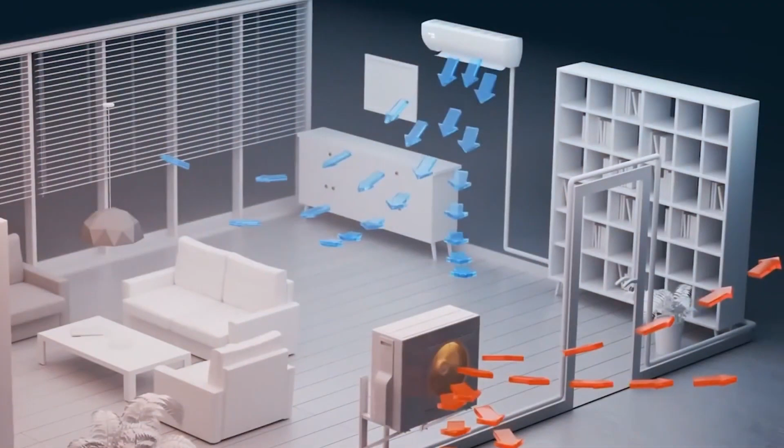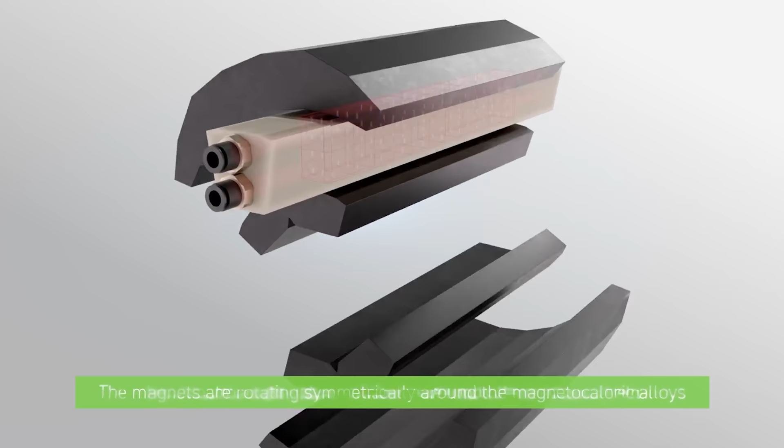Your fridge, your air conditioner, the cold chain that keeps your medicine alive—every single one of them runs on a technology that hasn't fundamentally changed in over 100 years. And here's the part nobody tells you: the gas hiding inside those machines is quietly warming the planet thousands of times faster than the carbon coming out of your car. Now China is racing to replace all of it with something that has no gas, no compressor, and makes almost no sound at all, just metal and magnets. The problem? The material this whole revolution depends on—China already controls almost all of it.

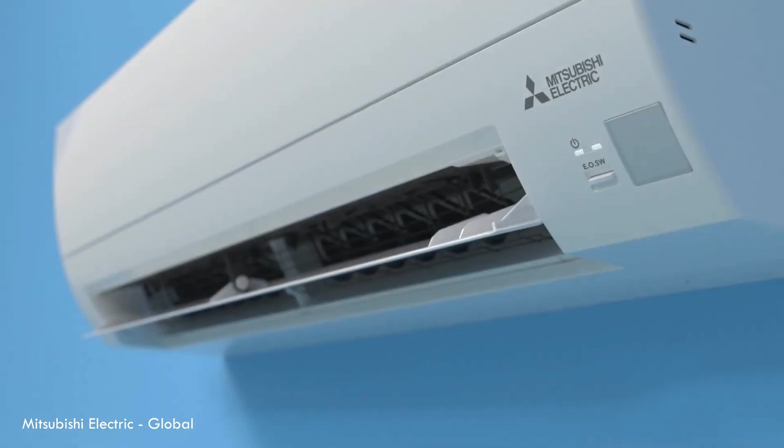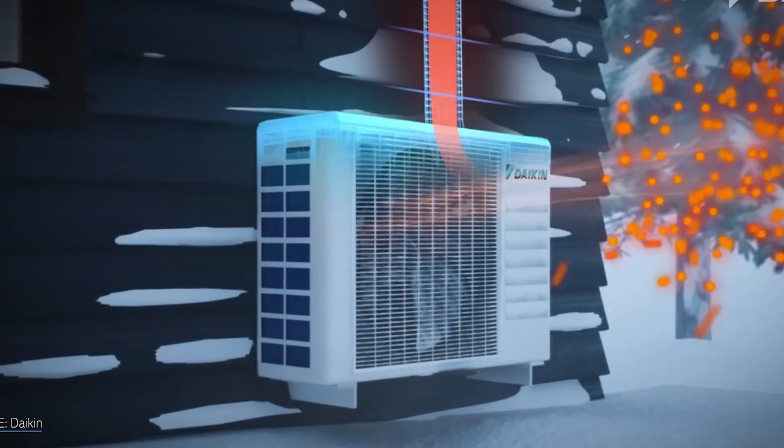Let me explain how your fridge actually works, because once you see it, you can't unsee it. Every fridge, every AC, every walk-in freezer runs on the same trick. You take a gas, you squeeze it hard with a compressor, and squeezing it makes it hot. Then you let that hot gas flow through coils on the back of the fridge, where it dumps its heat into your kitchen. Then you let the gas expand again, and expanding makes it cold. That cold gas loops back inside and pulls the heat out of your food. Squeeze, dump, expand, absorb—over and over, forever. That low humming sound you hear at night? That's the compressor doing this dance. It's a genuinely brilliant idea.

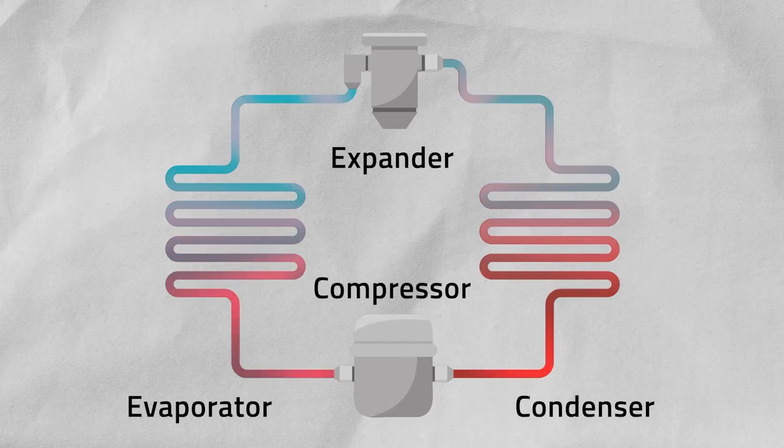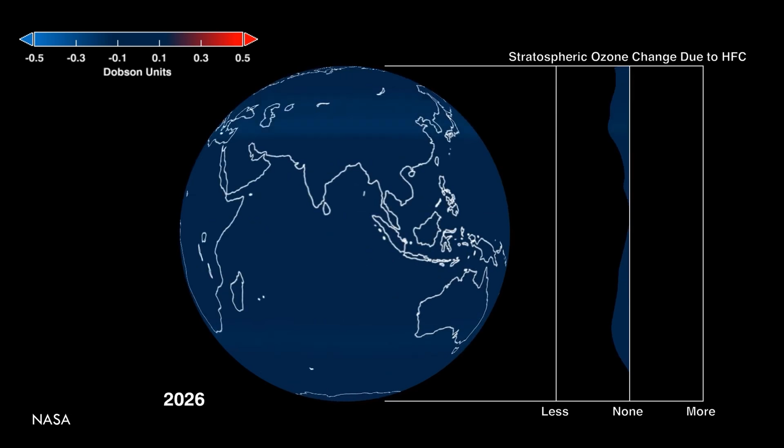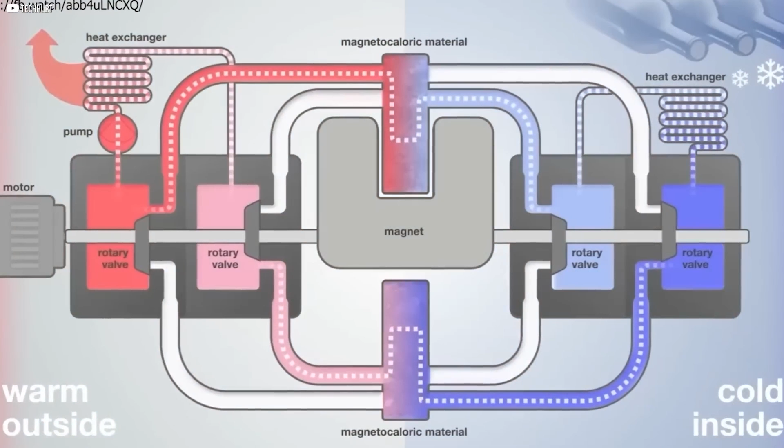Simple, cheap, reliable. But it has one flaw that we ignored for a century. The gases doing the work, the refrigerants, are some of the most powerful greenhouse gases ever created. We're talking about HFCs, hydrofluorocarbons. A single tiny leak of these gases doesn't just warm the planet a little, it warms it thousands of times more aggressively than the same amount of carbon dioxide. So while we were busy inventing cold, we were quietly cooking the atmosphere. And here's the frustrating part: every improvement we've made for decades—better insulation, smarter thermostats, more efficient motors—none of it touches the core problem. The gas is still there. The compressor is still there. The noise is still there.

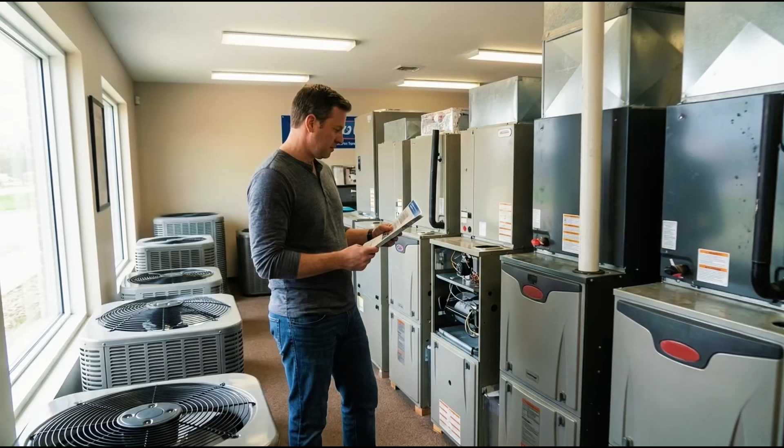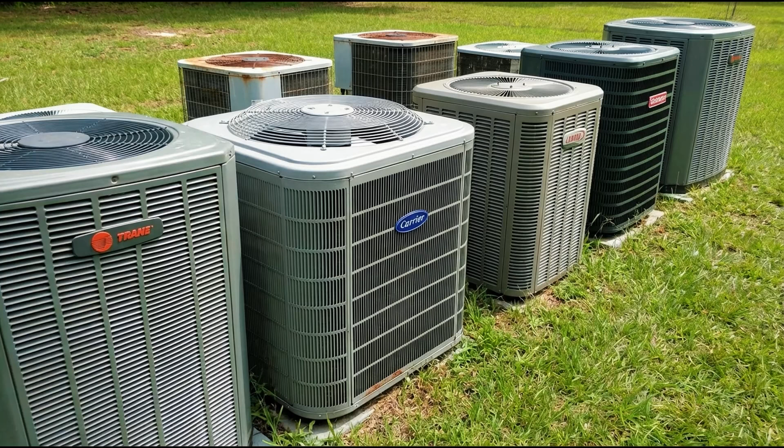And the scale of this is bigger than most people realize. Cooling isn't a small corner of our energy use. Think about it: every home fridge, every office AC, every supermarket freezer aisle, every hospital, and increasingly every data center full of servers that would literally melt without constant cooling. As the planet gets hotter and more of the world gets air conditioning for the first time, our demand for cold is climbing fast. Which is a strange trap when you think about it. The hotter it gets, the more we cool. The more we cool, the more of these gases leak out, and the hotter it gets. We built ourselves a loop that feeds itself.

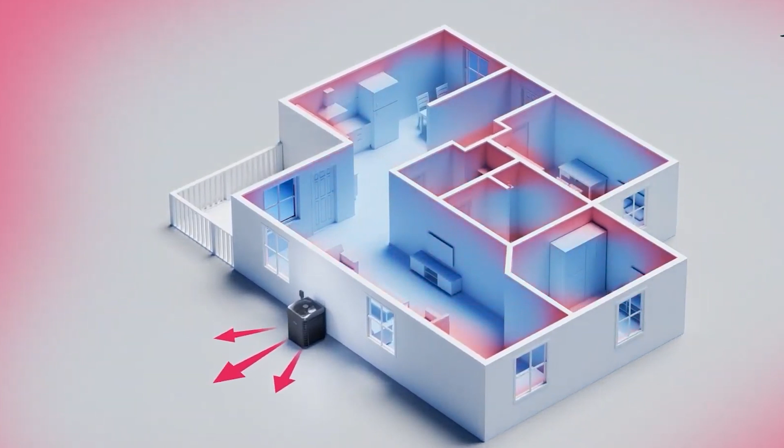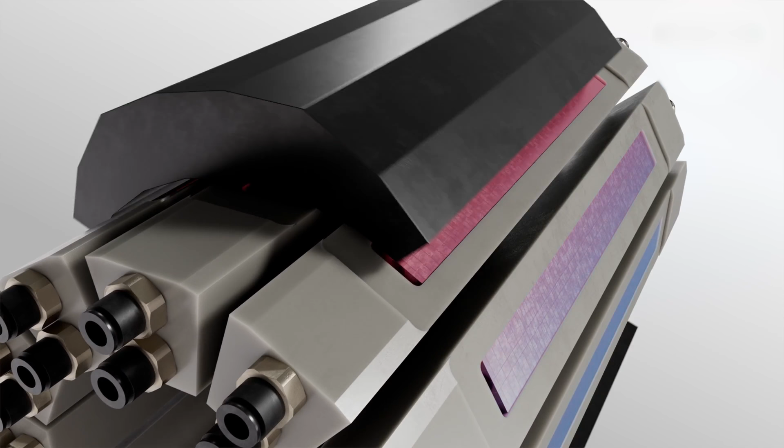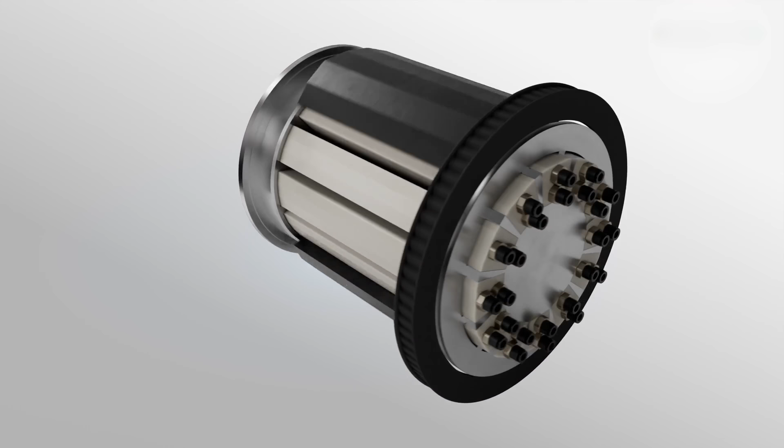So engineers around the world started asking a wild question: what if you could create cold without any gas at all? No squeezing, no leaking, no 100-year-old compressor. And it turns out the answer isn't hiding in a better liquid—it's hiding inside solid metal. This is where it gets strange. Okay, so how on earth does a magnet make something cold? This sounds like magic. It isn't. It's one of the most beautiful pieces of physics you'll ever hear, and I promise I'll keep it simple.

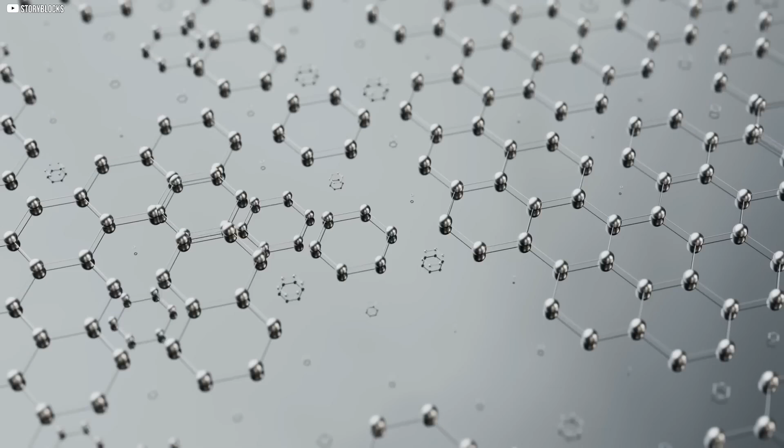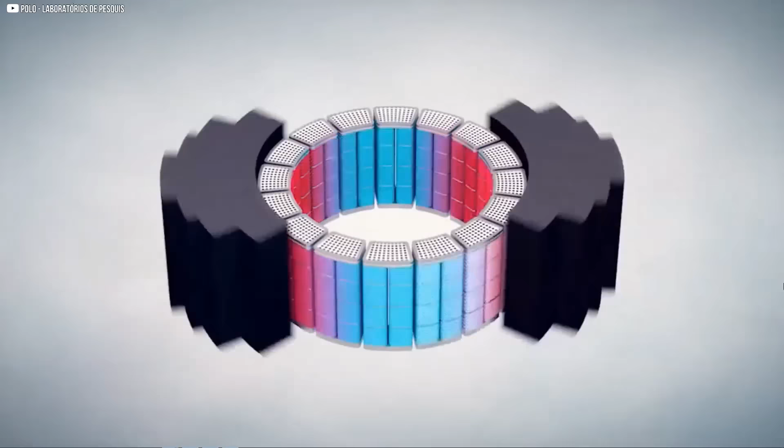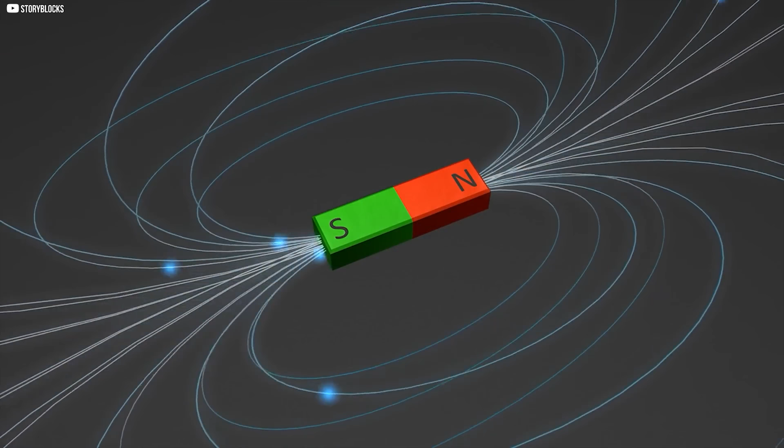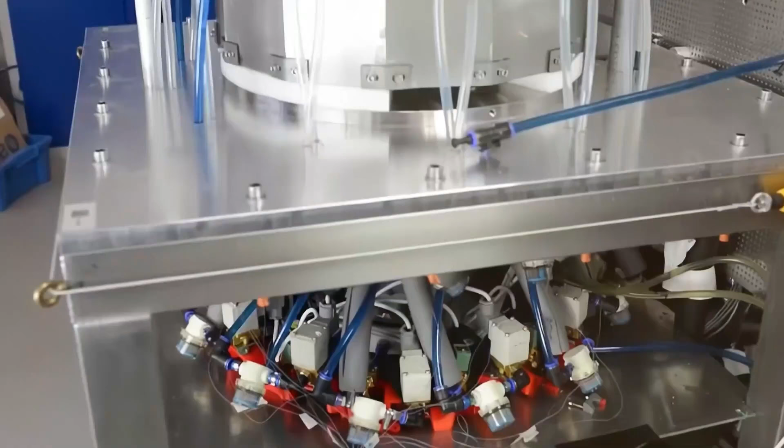Take a special metal—the classic example is gadolinium, a silvery rare earth metal. Inside that metal, every atom acts like a tiny compass needle. Normally, those little needles point in random, messy directions. Now, bring a strong magnet close. Suddenly, all those messy little atomic compasses snap into line, all pointing the same way. And here's the key: when they get organized like that, the metal releases energy as heat. The block of metal literally warms up just from being magnetized. Then you pull the magnet away. The atoms lose their marching orders and fall back into chaos. And to fall back into that messy state, they have to pull energy in from their surroundings. So the metal gets cold—genuinely cold, cold enough to chill the air or the water around it. That's it. That's the whole secret.

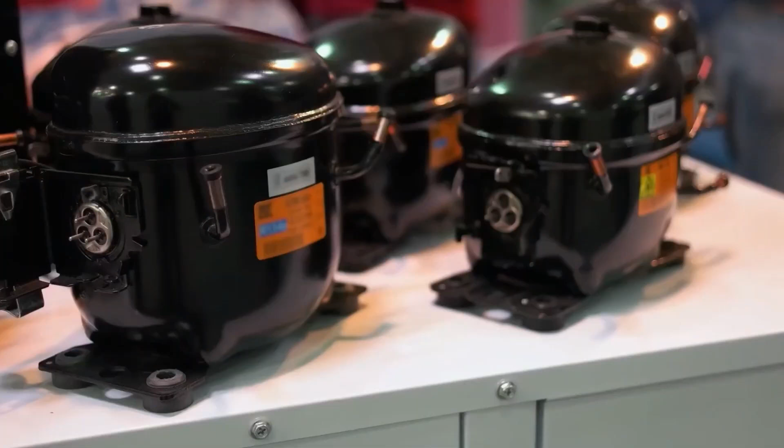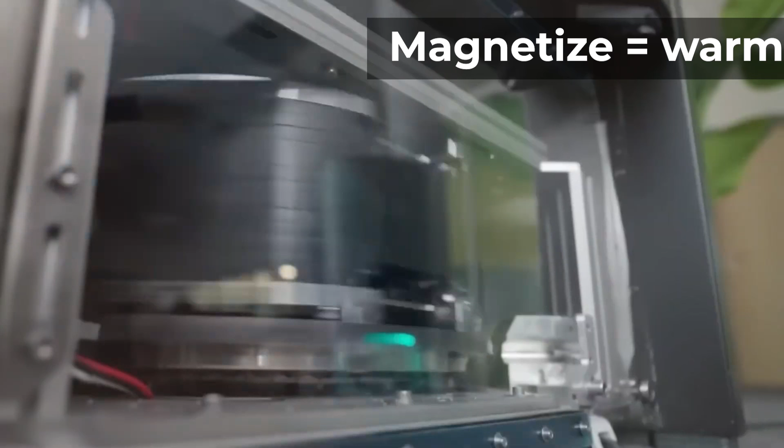It's called the magnetocaloric effect, and scientists have actually known about it since 1881. No gas, no compressor, no leaks, almost no sound. Think of it like a sponge, but for heat instead of water. Magnetize it, and you squeeze the heat out. Demagnetize it, and it soaks the heat back up. The magnet is just your hand, squeezing and releasing.

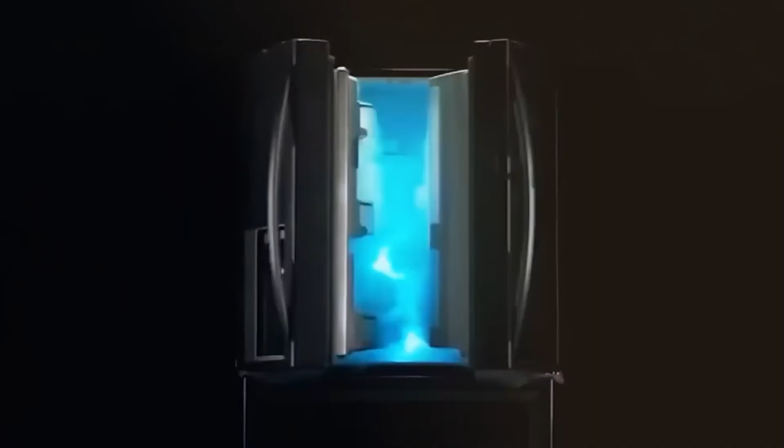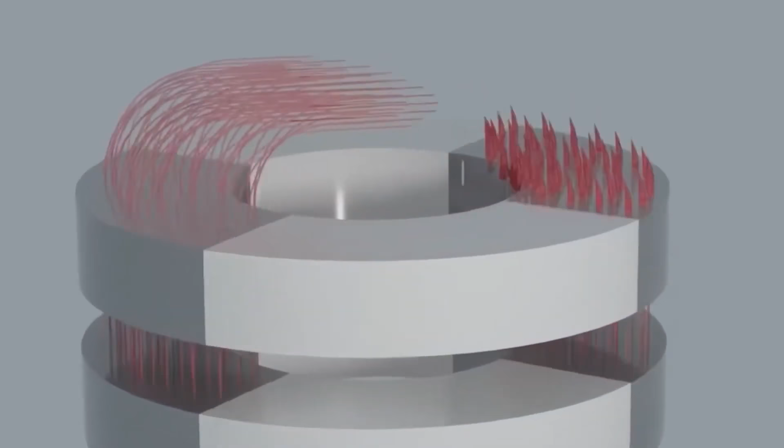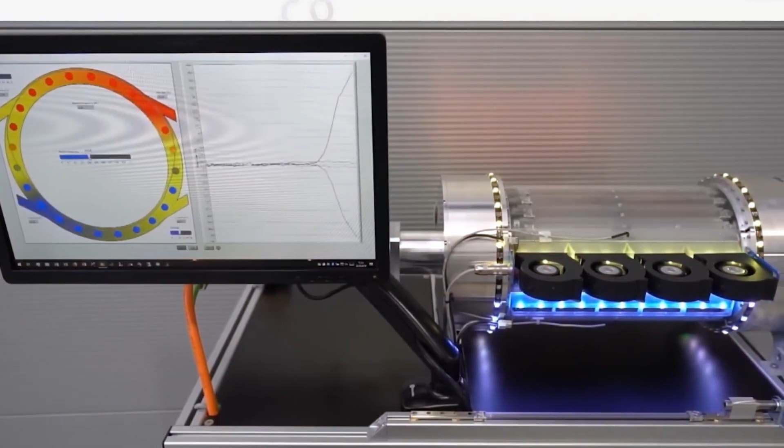And there's a reason this matters so much beyond just being clever. There's no gas that can leak, so there's nothing to warm the planet. The solid metal doing the work has what scientists call a global warming potential of 0. And because there's no compressor slamming away, there's almost nothing to make noise or wear out.

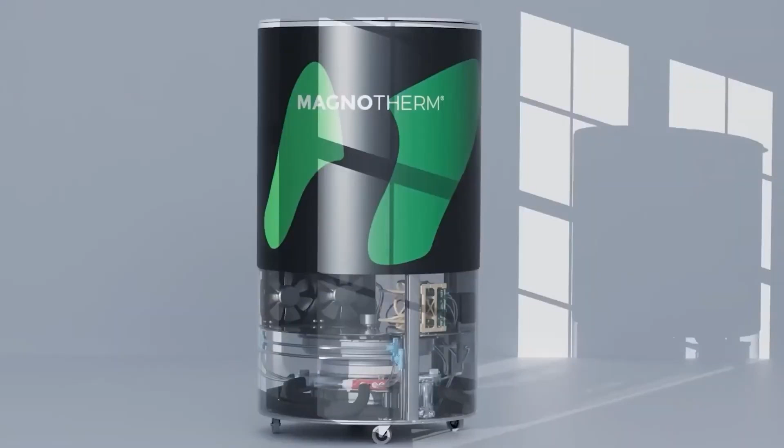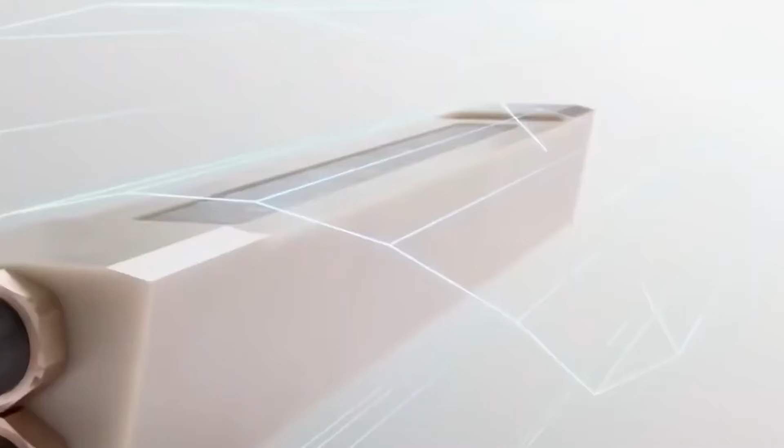For over a century, this was a laboratory curiosity. Cool in theory, useless in practice, because the temperature swings were tiny, a few degrees at best, and the materials that gave a big effect tended to wear themselves out fast. There's a problem scientists call hysteresis, basically the material getting sloppy and losing energy every cycle, degrading a little more each time until it stops working well. So for decades, you had a cruel trade-off: materials that cooled powerfully didn't last, and materials that lasted didn't cool much.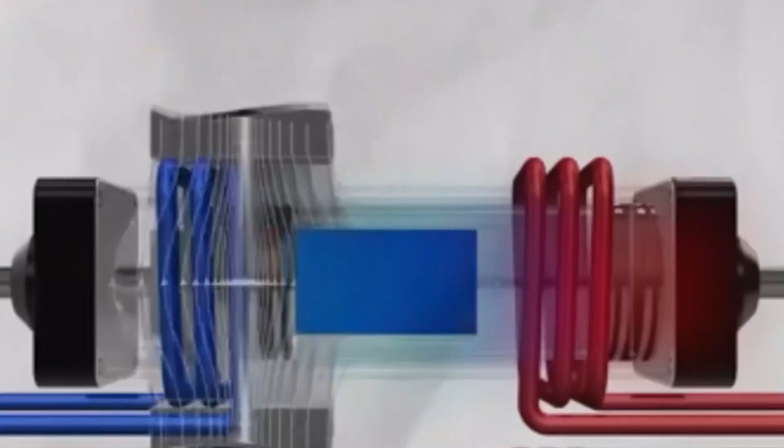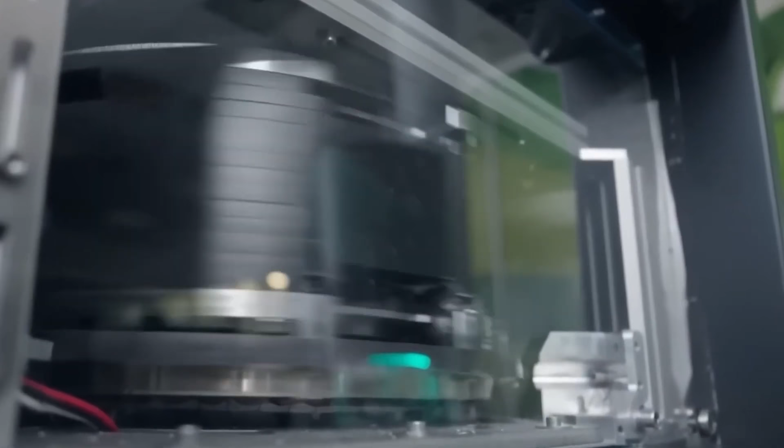But recently, that changed. In labs from Japan to Germany, researchers finally started cracking the materials problem, discovering new metal recipes that swing temperature harder and survive the endless cycling without falling apart. One recent breakthrough more than doubled the usable cooling effect of a material while keeping it stable cycle after cycle. And the moment those pieces started clicking into place, the race to own this technology began.

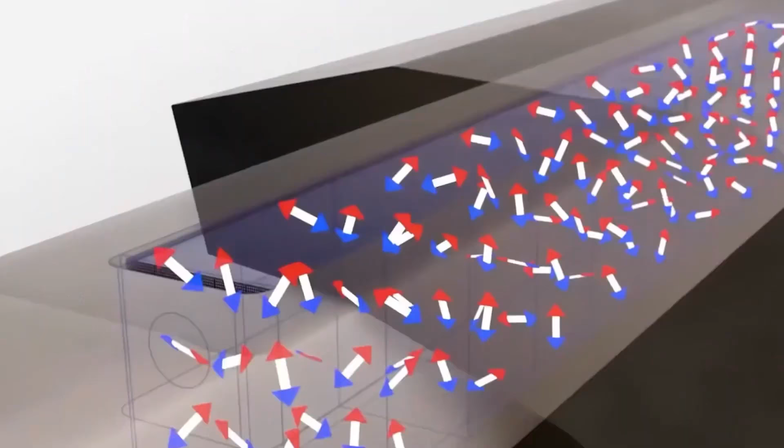And one country had a massive head start. For years, the leaders in this weren't in China. They were in America and Europe. In the United States, at the Ames Laboratory in Iowa, researchers built one of the first magnetic cooling machines that could genuinely compete with a normal fridge.

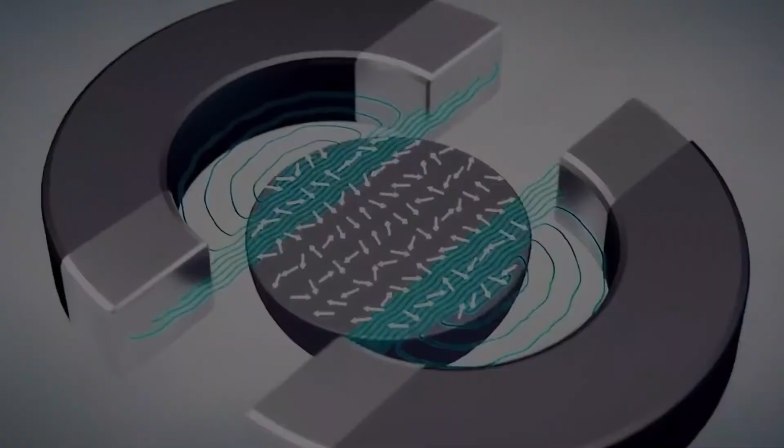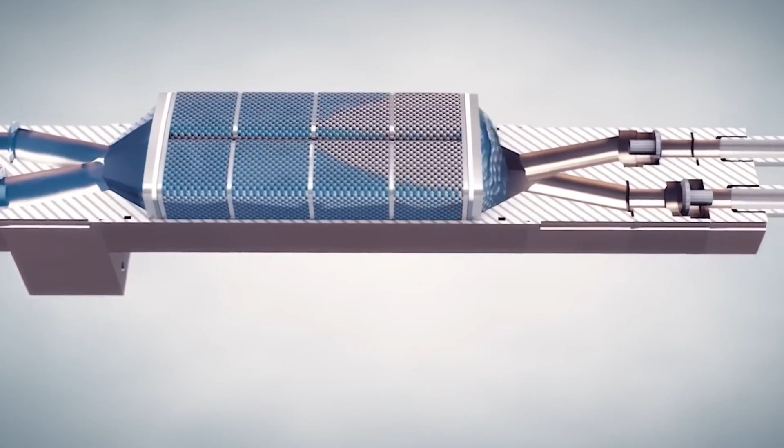The heart of it is a device with a mouthful of a name, an active magnetic regenerator. Picture a set of beds packed with tiny particles of magnetocaloric metal and a big disk of permanent magnets spinning above them. Every time a magnet sweeps over a bed, that bed heats up. As it sweeps away, the bed cools down. Water, laced with an anti-rust additive, flows between them, grabbing the heat and hauling it away.

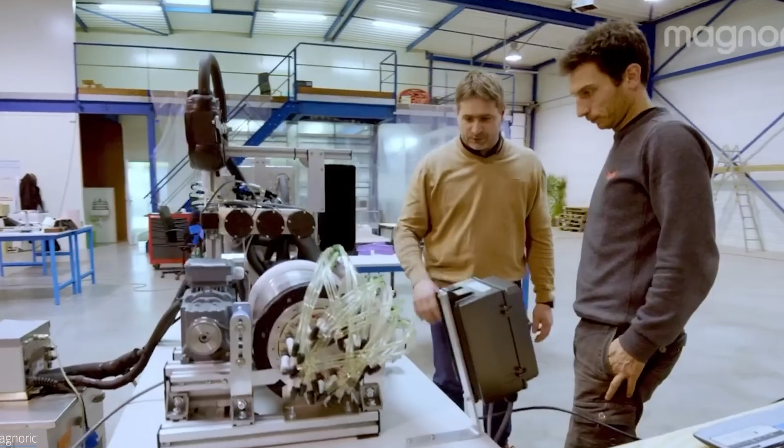And in Europe, this went from lab bench to store shelf. A German company built a fully commercial magnetic cooling unit, completely silent, running purely on magnetism. Another company, at a major refrigeration trade show, literally served people cold drinks straight out of a working magnetic fridge, right there on the floor. Not a slideshow, not a promise. A real machine handing you a cold soda.

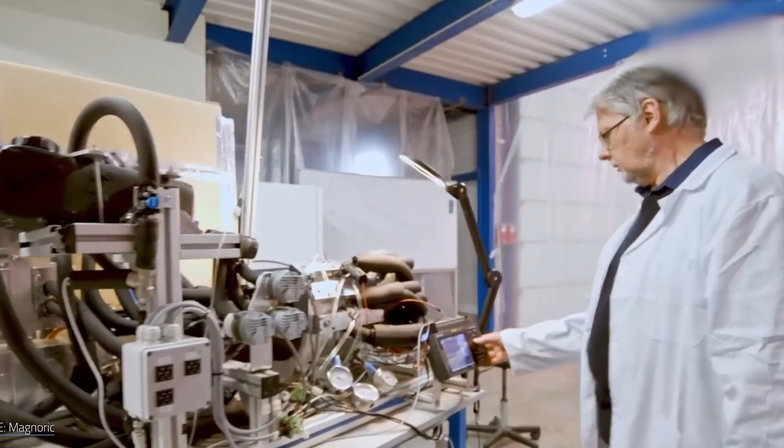Their targets aren't just kitchen fridges. They're going after supermarkets, hospitals, and data centers, the places where cooling has to run 24 hours a day and the electricity bills are brutal.

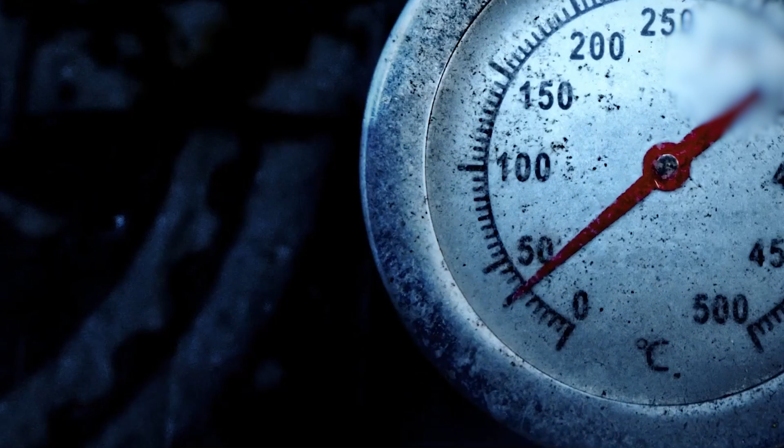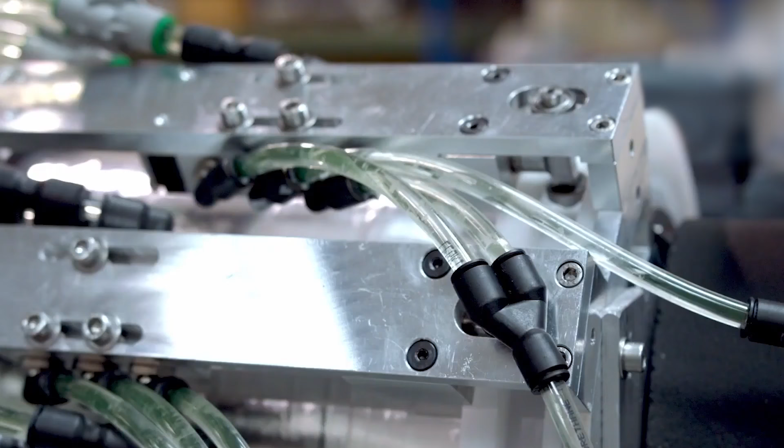But here's the twist that turns this from a science story into a geopolitics story. All of these machines, the American prototypes, the German products, every single one of them needs two things China happens to sit on top of: strong permanent magnets and rare earth cooling metals. And that's the part the West is only now waking up to. You can invent the coolest fridge in the world, but if you can't get the magnets or the metal to build it at scale, you don't actually own the future.

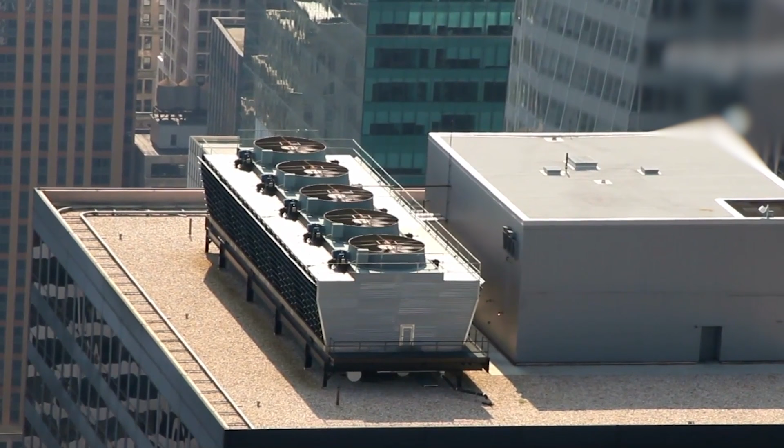You're just renting it. So let's talk about the country that owns the raw materials and what it's now doing with them. Here's the fact that reframes this entire video. Magnetic cooling doesn't run on magic. It runs on rare earth elements, and China controls the rare earth world almost completely.

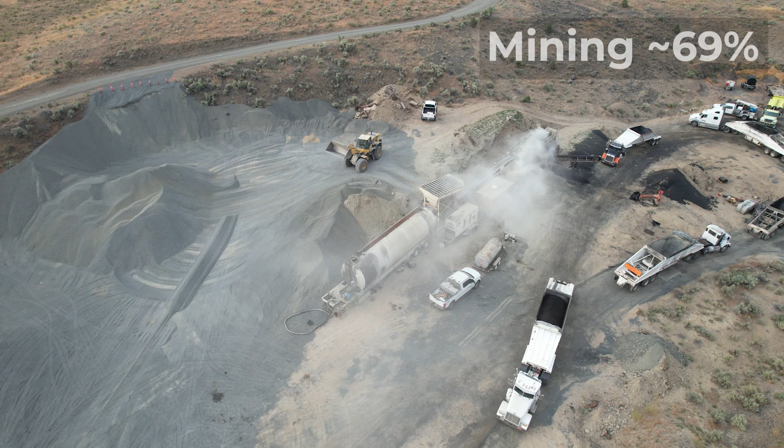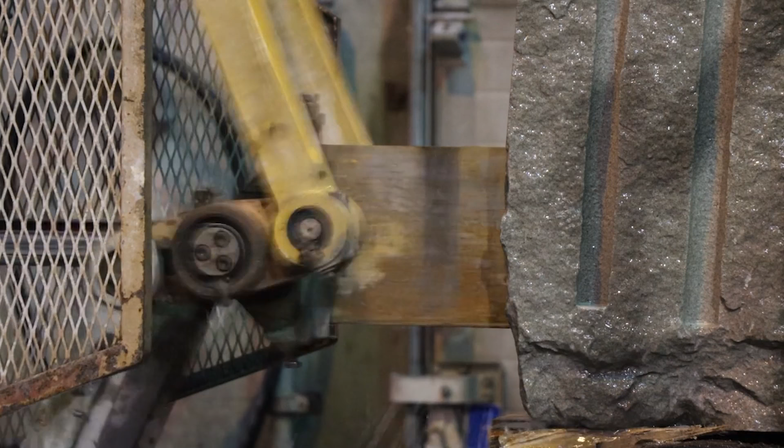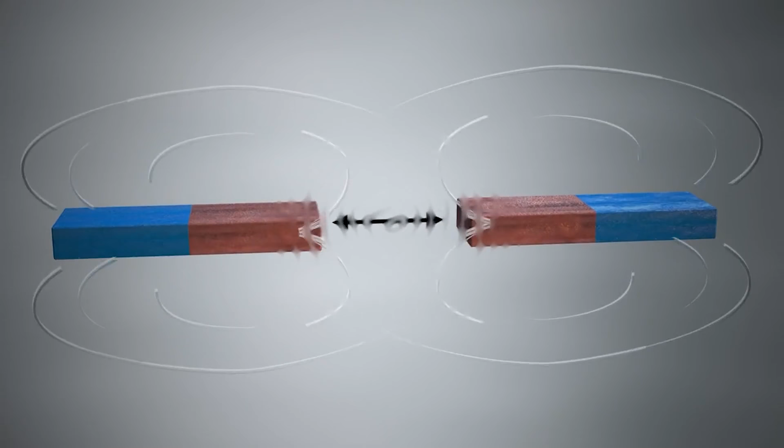Let me give you the real numbers because they're staggering. China mines around 69% of the world's rare earths, but mining is the easy part. The hard part is processing and refining them, and there, China handles roughly 90% of it. And when it comes to actually manufacturing the high-performance permanent magnets, the exact magnets a magnetic fridge needs, China makes somewhere between 90 and 94% of the global supply.

Now look at export controls on 7 rare earth elements, and gadolinium was on that list. Not by accident. The magnets we're talking about aren't just in fridges. They're in electric car motors, wind turbines, smartphone speakers, MRI machines, and deep in military hardware. A single advanced fighter jet contains hundreds of pounds of rare earth material. So when China adjusts the flow of these elements, it isn't just nudging the price of future refrigerators. It's touching the nerve center of modern industry and defense all at once.

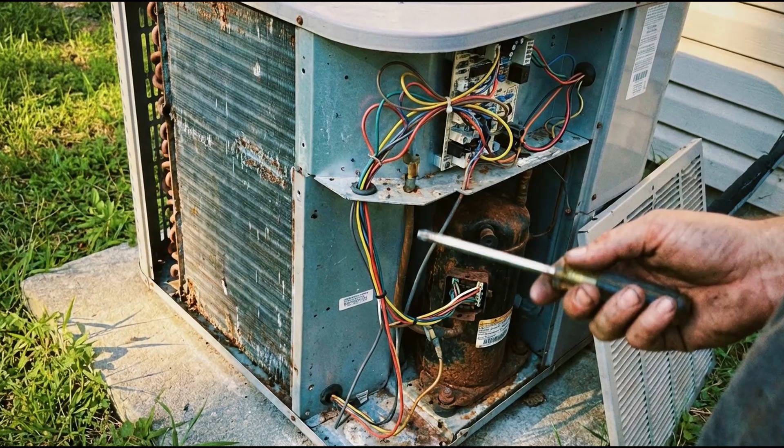Cooling just happens to be the next domino. So this is no longer just a story about a cooler fridge. It's a story about who controls the physical building blocks of the next century of cooling.

The West can design the machine, but right now, China holds the metal, the magnets, and the factories.

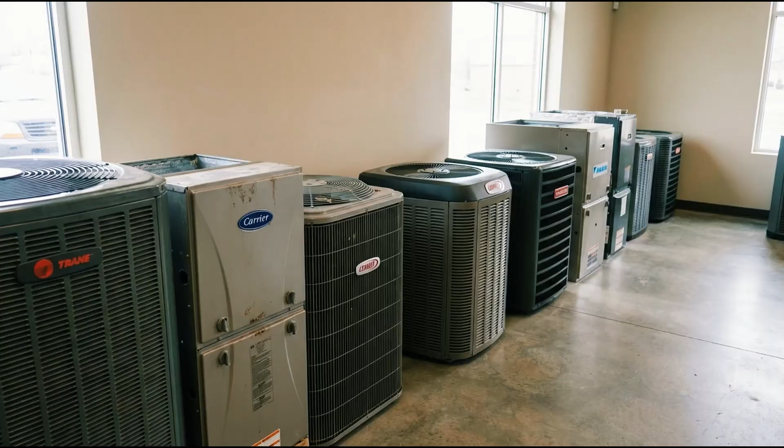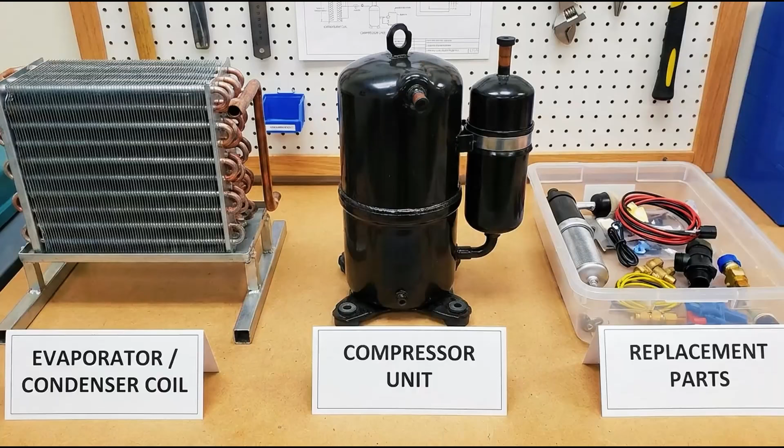And Chinese labs aren't sitting still either. Their universities and research institutes, from the Chinese Academy of Sciences to major technical universities, are pouring effort into new magnetocaloric materials and into integrating the whole system, from raw ore in the ground all the way to the finished cooling device. That's the part that should really get your attention.

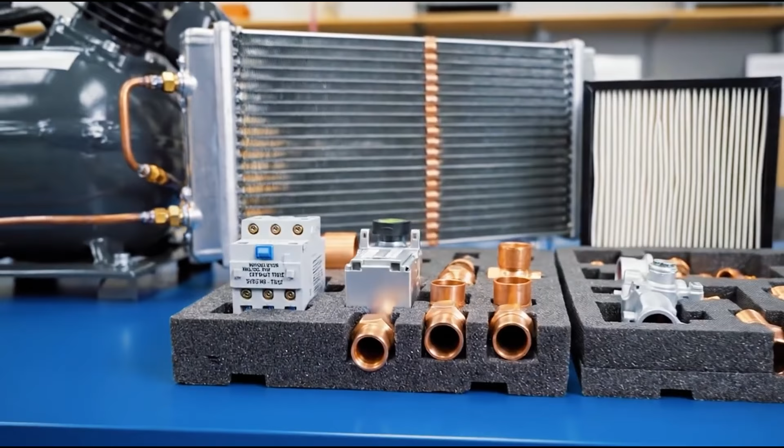Now, before anyone panics or celebrates, let me be honest about where this actually stands. Magnetic cooling is not going to replace your fridge next year. There are real, stubborn hurdles.

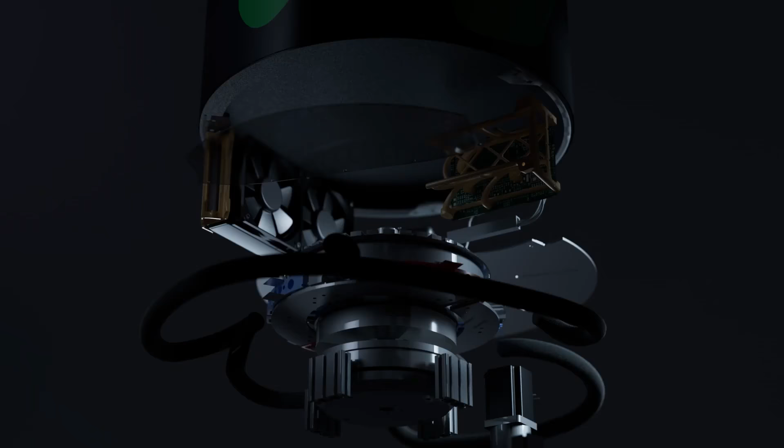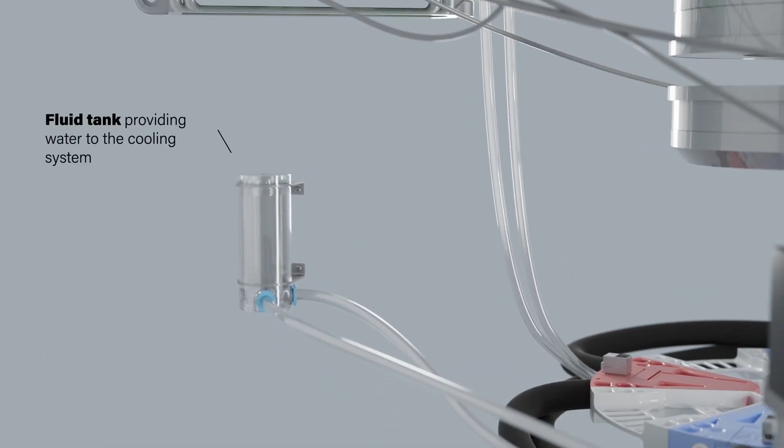The first is the magnets themselves. To get a strong enough cooling effect, you need seriously powerful magnetic fields, more than 1 Tesla, which is far beyond a fridge magnet. And those high-grade permanent magnets are expensive and in fierce demand from other industries: electric car motors, wind turbines, missiles, MRI machines. Everybody wants the same magnets. So the raw material isn't just controlled by one country, it's also fought over by a dozen industries at once.

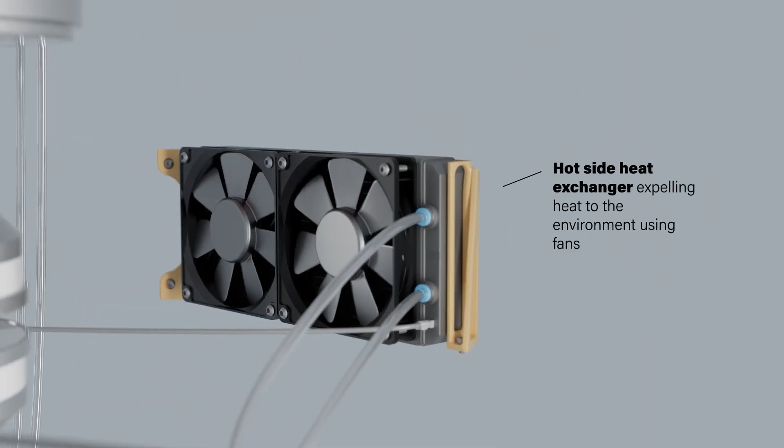The second hurdle is size and cost. Right now, these systems are bulky and pricey. Shrinking them down cheap enough to sit in your kitchen is genuinely hard engineering.

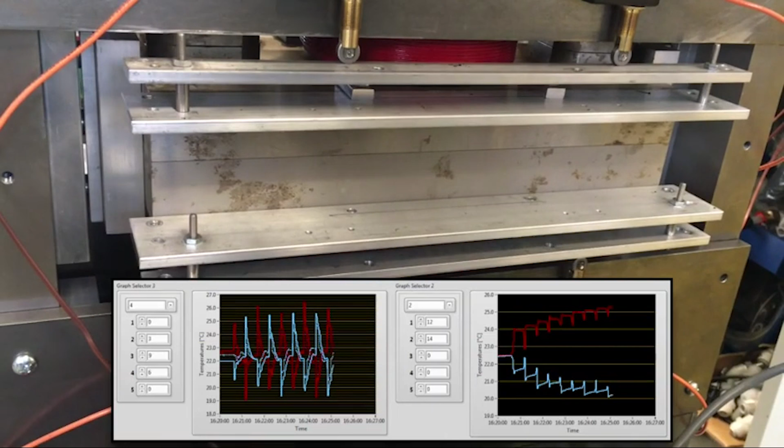And there's a rival technology snapping at its heels. It's called elastocaloric cooling. Instead of magnets, it uses mechanical stress. You physically stretch or squeeze a special metal, and that makes it heat and cool. On paper, it can be a little more efficient, and it skips the rare earth magnet problem entirely. But it has a weakness: constantly stressing metal wears it out over time, like bending a paperclip back and forth until it snaps.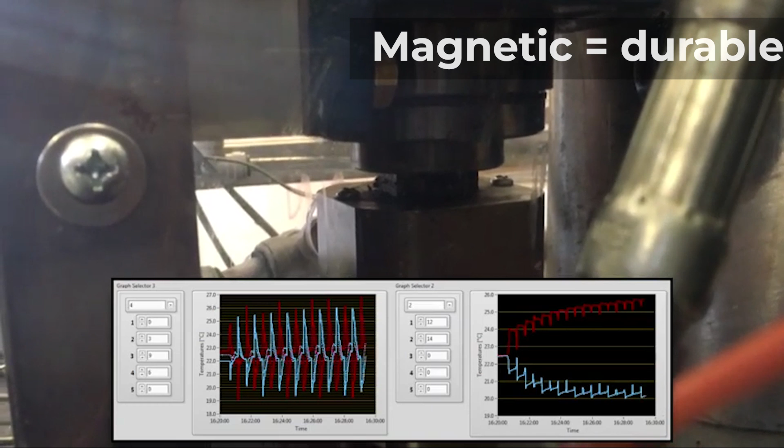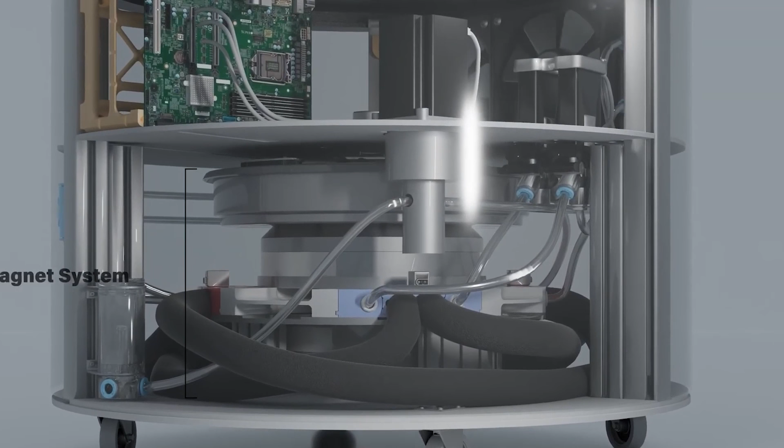So magnetic cooling's biggest advantage is durability. No metal fatigue, no snapping. It just quietly runs and runs. That's exactly why it's so attractive for hospitals and data centers, places where a cooling failure isn't an inconvenience, it's a disaster.

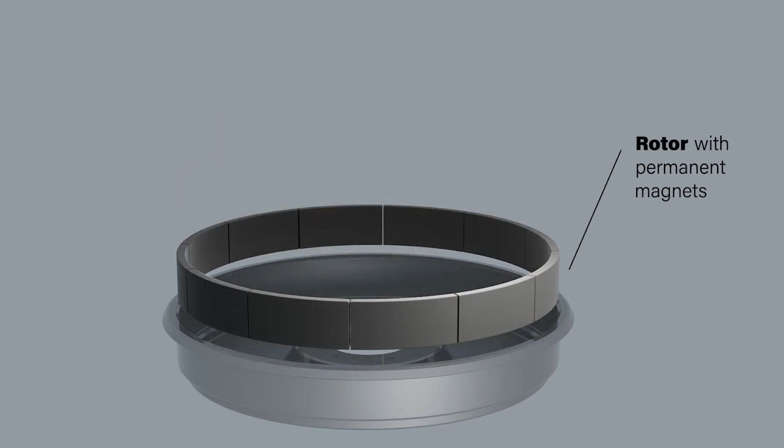And the whole global market is exploding. Analysts expect magnetic refrigeration to grow from a couple $100 million in 2025 to over $1 billion by 2030. That's the kind of growth that turns a laboratory curiosity into an industrial gold rush.

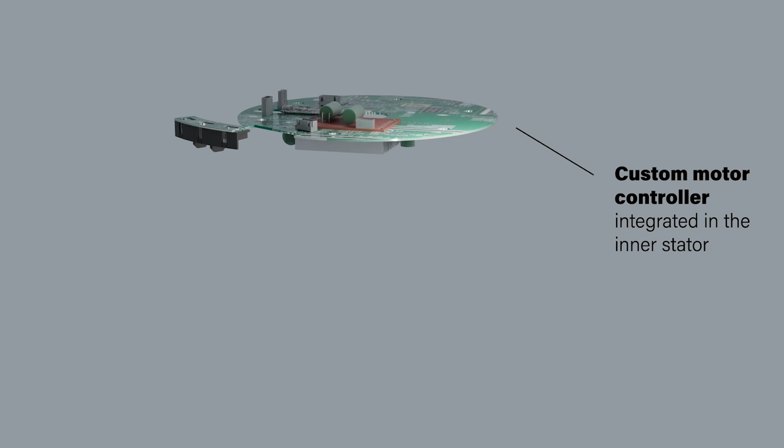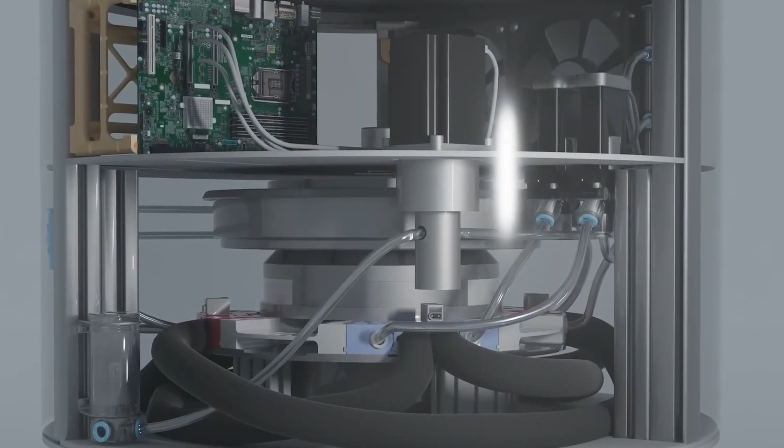So the path forward is clear. Whoever makes the materials cheaper, especially that lanthanum iron silicon alloy, and whoever locks down the magnet supply, wins. And on both of those fronts, one country is already sitting on the finish line before the race has really begun. So let's zoom out and imagine the world this actually builds.

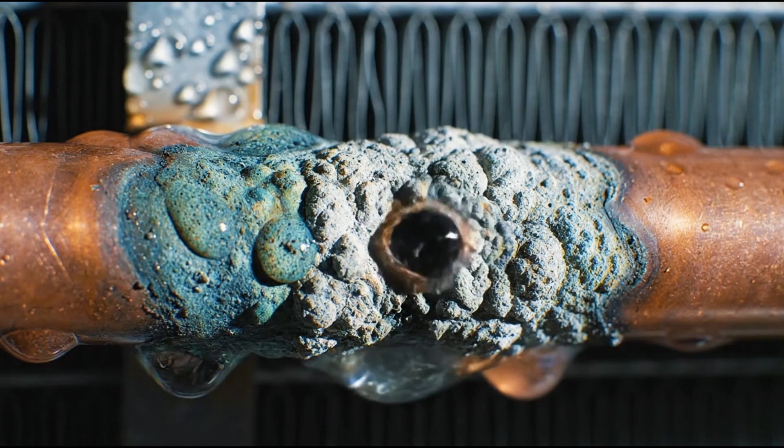Picture a fridge that makes no sound at all. No hum, no buzz, no rattle at 3 in the morning. An air conditioner that cools your whole apartment in total silence, with no gas that can ever leak into the sky. A cold chain that carries vaccines across continents without a single greenhouse molecule escaping. That's not science fiction. That's what a mature magnetic cooling world looks like.

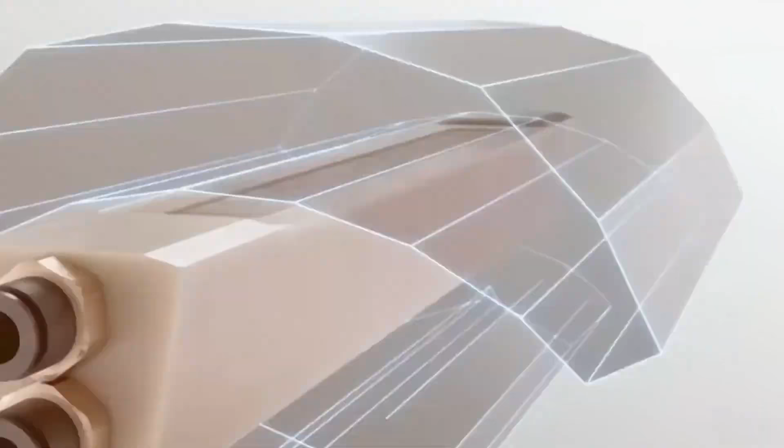The likely order of arrival goes like this. First, the big industrial players, the supermarkets, the hospitals, the data centers, swap their old gas systems for silent magnetism because they feel the electricity bills and the regulations first. Then, as the materials get cheaper and the machines shrink, it works its way down into our homes.

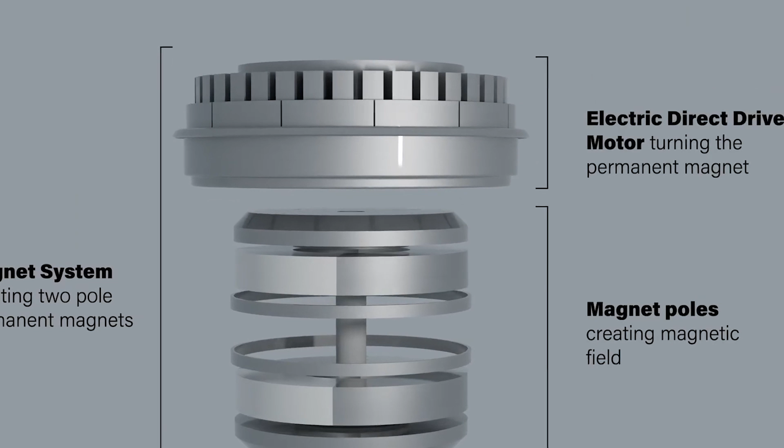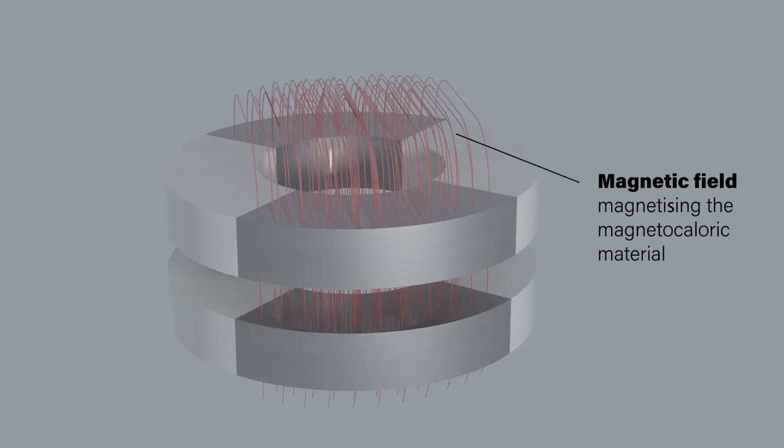But here's the thought I want to leave you with. The country that ends up controlling this isn't necessarily the one that invents the best machine. It's the one that controls the metal and the magnets underneath it. And today, that's China, holding roughly 90% of the processing and the magnet making that this entire technology stands on.

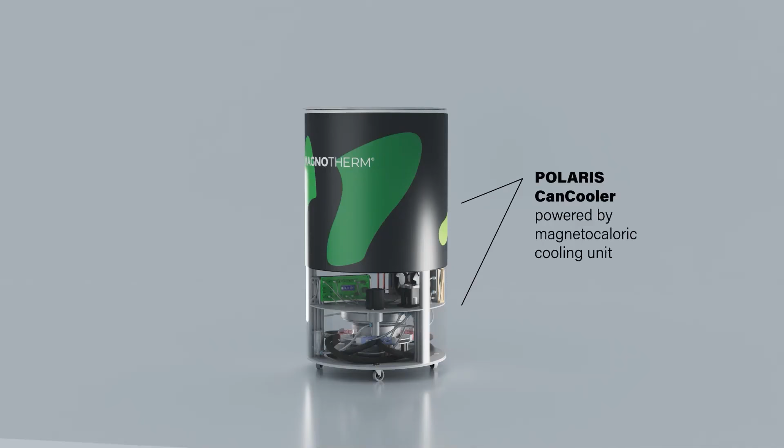So the next time you open your fridge and hear that familiar hum, remember, you're listening to 100-year-old technology on its way out. The future of cold is silent, it's solid, it's magnetic. And the race to own it is one of the quietest, most important contests of our time. Most people will never notice it happening.